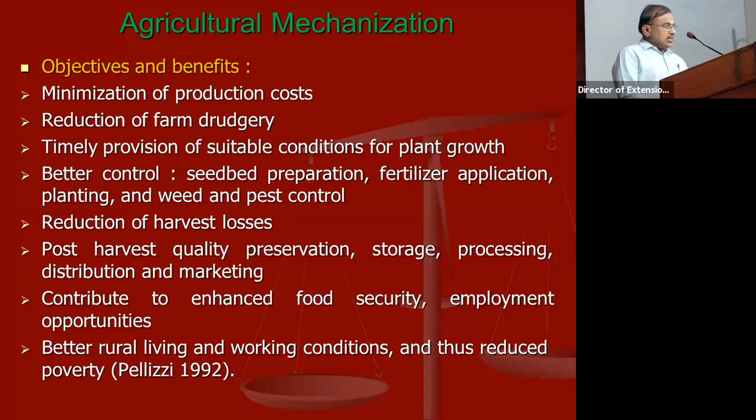Altogether, it helps the food security of our nation. Similarly, it also generates the required employment opportunities. So farm mechanization also helps for better rural living and working conditions of the people, and thus reduces the poverty present in rural agriculture. Now, I am going to deal with some of the machineries that are really practicable and applicable for the present situation.

So, concerning the paddy crop, the first operation we normally do is ploughing, followed by standing water, then we do the puddling operation. In conventional puddling, cage wheels are fitted to the tractor, and with either the cultivator or rotavator, the tractor power source is operated in the main field.

Now, the entire scenario can be changed if you have a rice special tractor with rotopuddler. Automatically the required condition of the puddling will be improved. You will have better quality, very good time reduction, and less water requirement, and this may also help in the mechanized transplanting operation. So like this, it has a lot of applications.

The next one is the laser leveler exclusively for wetland condition. In the wetland condition for paddy growing, water is one of the critical inputs which has to be given throughout the period of the crop. We have to see that the water is well maintained and conserved.

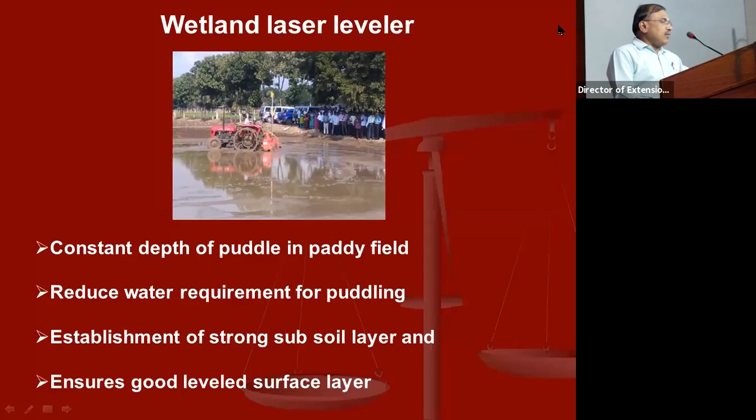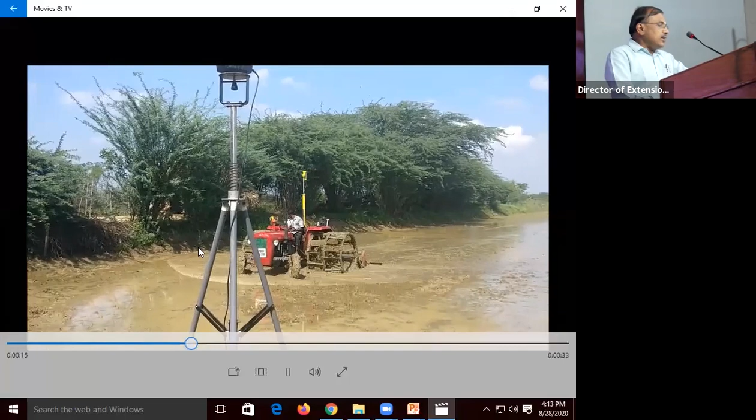Now, if you see this video clipping, you will understand the performance of the wetland laser leveler. Actually, this laser leveler is an attachment to any tractor, whether the tractor has cage wheels or is the rice special tractor. The laser leveler unit consists of a laser transmitter and laser receiver. This laser receiver is mounted on the rotopuddler unit, which is mounted at the rear side of the tractor.

So this rotopuddler movement is controlled by the laser receiver. You can see here the entire width of the field is uniformly level. If the field is uniformly level, then automatically you get the advantage of uniform standing water throughout the field. This is the main advantage of this wetland laser leveler.

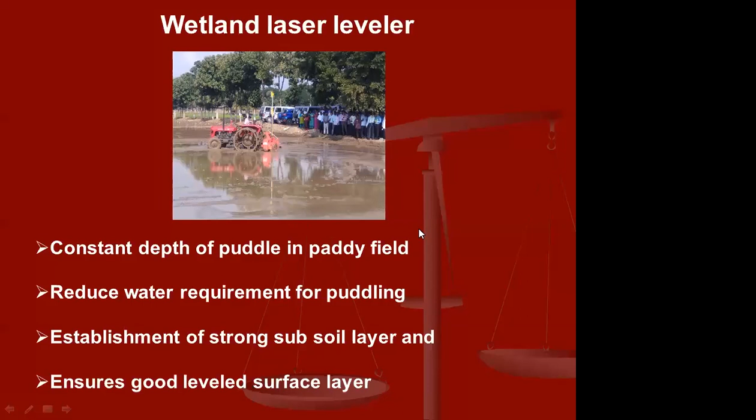Then the next important operation uses what is called a ridge plastering machine. This machine forms bunds around the periphery of the field. It is an attachment to the tractor, driven by the power take-off shaft of the tractor with a 3-point hitch system. At optimum soil moisture condition, this implement works well, which helps to form the bunds around the periphery of the field.

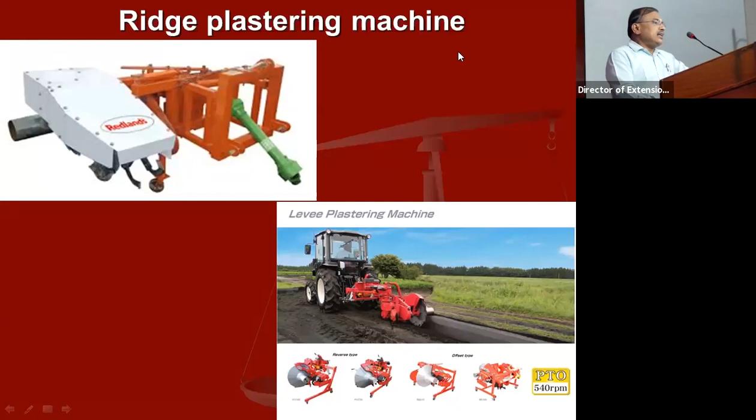Then the next important operation is nursery preparation. Since we are talking about mechanization, we require either a mat type nursery or a tray type nursery. Both nurseries can be prepared either by using a manual seeding machine, or you can also have an automatic seeding machine. So this machine is called a manual seeding machine,

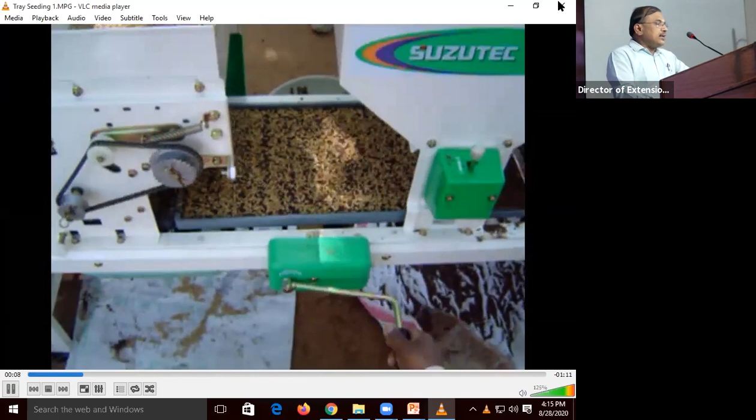to which you have to feed the trays one by one. Then the seeds will be dropped continuously. So like this, you have to operate it. Once you operate it, the seeds will be dropped on the trays. So this is a manually operated machine through which you can drop the seeds over the trays.

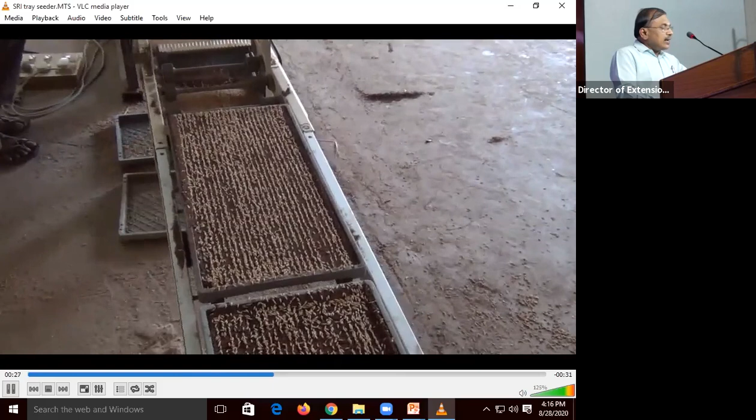Then similarly, we are having another SRI tray seeder, which is automatic. So what this machine does is, first you are feeding the pro tray. In the pro tray, the soil is first deposited. Over the soil, the paddy seeds will be just dropped in a line. So you can visualize how the seeds are dropped. So while germinating, the seedlings will be having uniform diameter throughout the space. So this is the advantage of the nursery preparation machine.

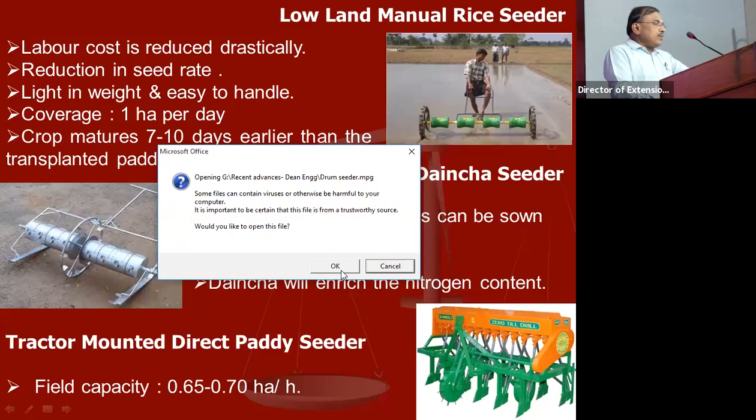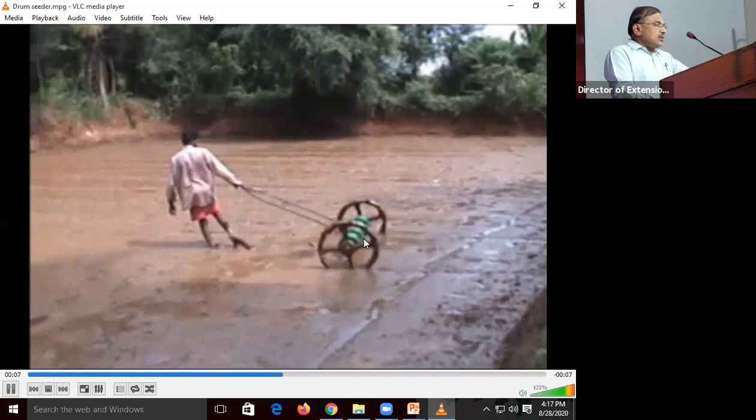Then sometimes, as far as Tamil Nadu condition is concerned, if we don't have enough water, or if the water is not available, then the better option is you can go for the lowland drum seeder, direct drum seeder. Here you should use the pre-germinated paddy seeds, and you can fill in the drums. In 8 rows, seeds will be dropped uniformly. At the time of operation, there should not be any standing water, and water should be drained. Then you operate it, and seeds will be sown in 8 rows.

So if you operate it, there is a very good reduction in labor cost as well as seed rate, and you can cover around 1 hectare per day. And one advantage you are getting is the crop matures 7 to 10 days earlier than the transplanted paddy. But one thing I want to share is, when you use this drum seeder, better to have a pre-emergence herbicide through which you can avoid the first weeding.

And similarly, another equipment is called a paddy cum Daincha seeder. Here you will be having dropping of paddy and dhaincha seeds simultaneously in alternate rows, at a distance of around 25 centimeter, so between the paddy rows, one row will be with dhaincha. So this dhaincha and paddy will have uniform growth. Then during first weeding, you can either operate the Cono weeder, or you can have the SRI paddy power weeder, through which you can just submerge the dhaincha in the standing paddy field, through which you will be enriching the nitrogen content.

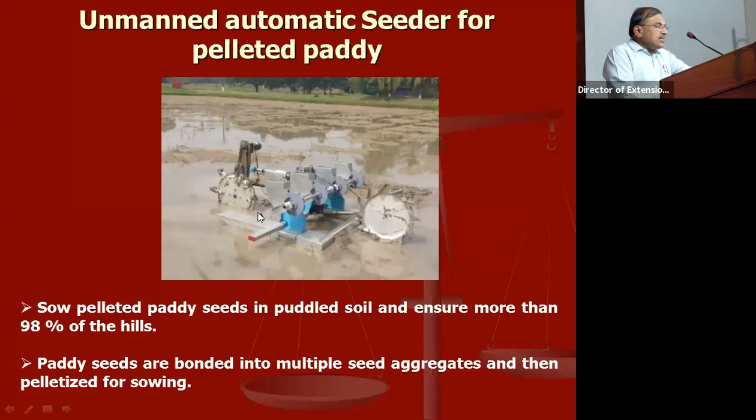Once it is established, the row to row spacing is 30 centimeter. Within a row, you can have 20 centimeter, 15 centimeter or 25 centimeter as per your requirement. But one thing I want to share is, at each place you may have a minimum of 2 to 3 seedlings per hill. This is the main advantage of this machine. We already developed this, and we are conducting trials. Once the trials are over, next year we will definitely be releasing this equipment for our farmers' benefit.

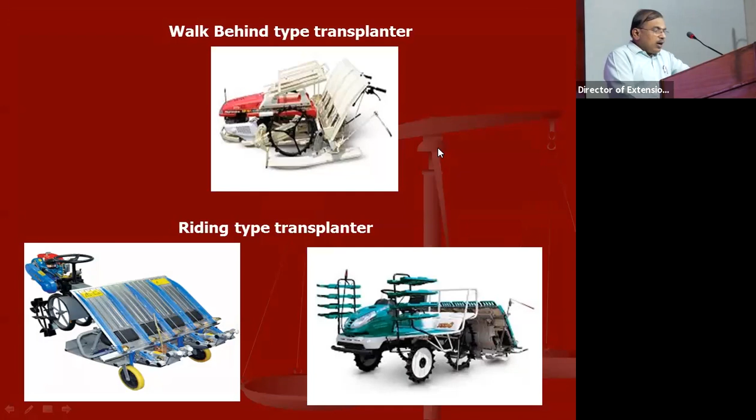So I recommend all these types of transplanter, but my recommendation is try to use the riding type transplanter. This riding type transplanter is very useful. The laborers need not walk in the puddled soil condition. They can sit comfortably and ride the transplanter. At a time, 6 rows transplanting will take place. Row to row spacing will be around 30 centimeter. Within the row, you can have 15 centimeter or 22 centimeter; as I said, the provision is there. Using this machine, we have now established around 16 acres of paddy field at our agricultural research station, Bhavanisagar. So this is the riding type 4-wheel drive transplanter.

Next is the weeding operation. Weeding is an important operation, for which we are recommending 2 things. One is called a Cono weeder, and another one is called a paddy power weeder.

This cono weeder design is based upon the IRRI design, which requires very good strength to do the push and pull operation, and this results in around 0.12 to 0.18 hectare per day. Whereas if you go for this paddy power weeder, it does the weeding operation beautifully.

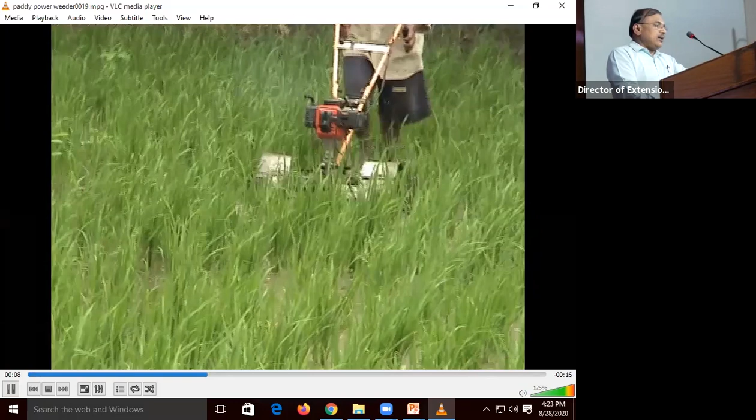So this is very lightweight equipment. It can be carried by one person without any problem. It can do the weeding operation in either 2 rows or 3 rows at a time. And this equipment is useful both for drum seeded paddy as well as transplanted paddy. You can use this equipment.

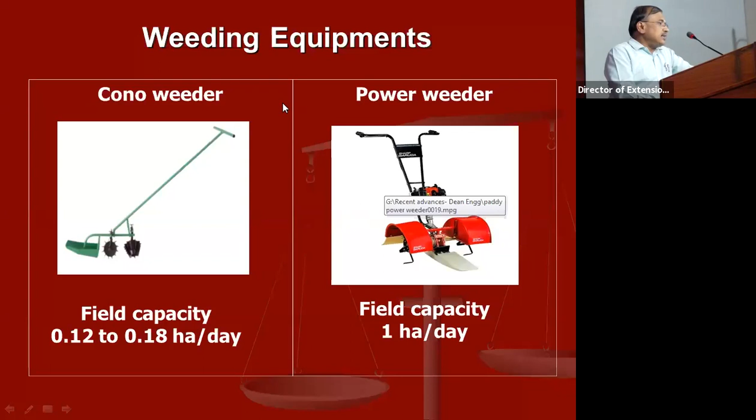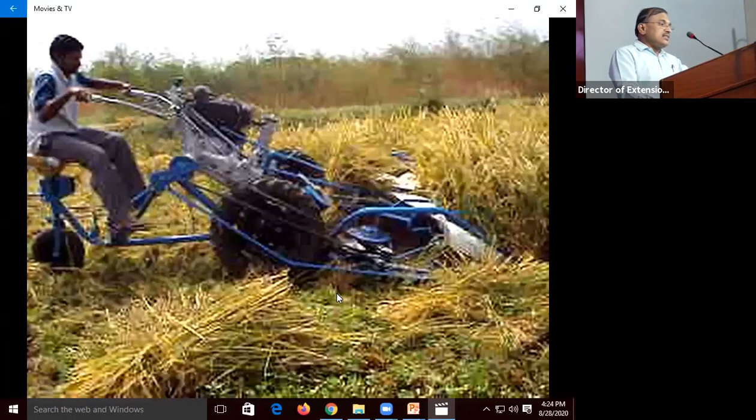And next is called a self-propelled reaper binder. This is a commercially available one through which you can do two different operations. One is called reaping, that is the harvesting operation, and another is called the binding operation. This machine does both operations simultaneously and it makes bundles in the field. So this is called the BCS reaper binder.

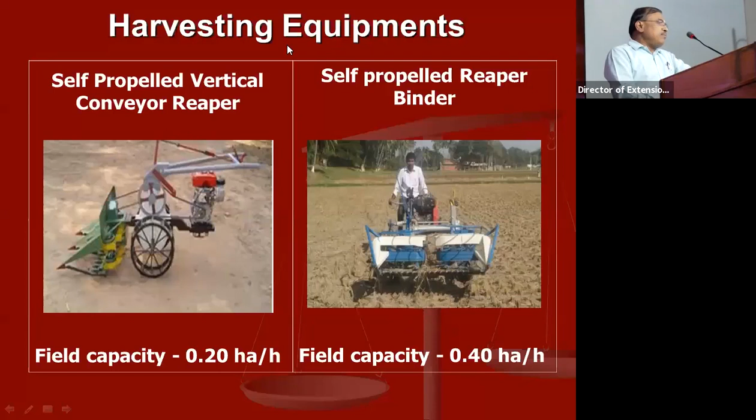So these two equipments you can strongly recommend wherever there is no way to use the present combine harvester. Using this equipment, you can harvest an area of 1 acre per hour. Then, as I said, there are a number of combine harvesters available: riding type small combine, track type small combine, tractor operated combine harvesters, paddy earhead harvesters, then paddy straw chopper. Like this, a number of equipments are available.

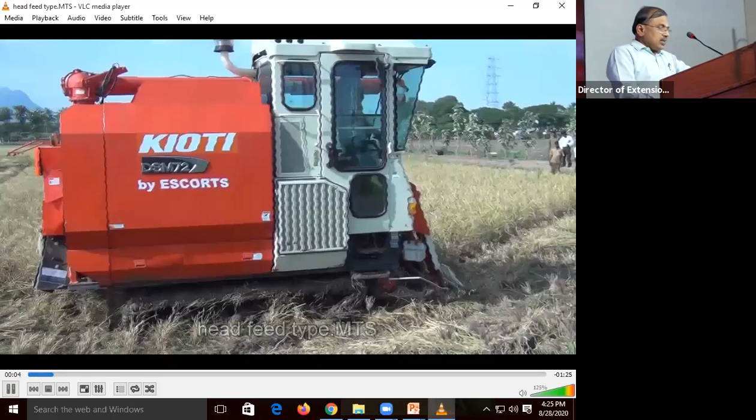So this is called a track type earhead harvester, through which you will be harvesting only the earheads of the paddy crop, and the straw will be cut and just deposited over the field. We have tested this equipment in our university. It does very beautifully. Wherever the clay soil is more, instead of the wheel type paddy combine, you can go for this track type paddy combine.

Here you will be harvesting only the earhead portion. The earhead portion will be threshed and the grains will be stored in the hopper present in the combine itself. Once this 600 kg hopper is filled, you can stop it and unload it. So this machine is called a track type combine.

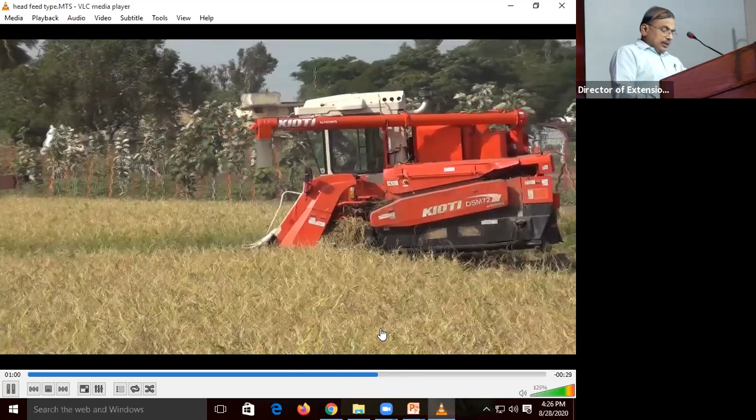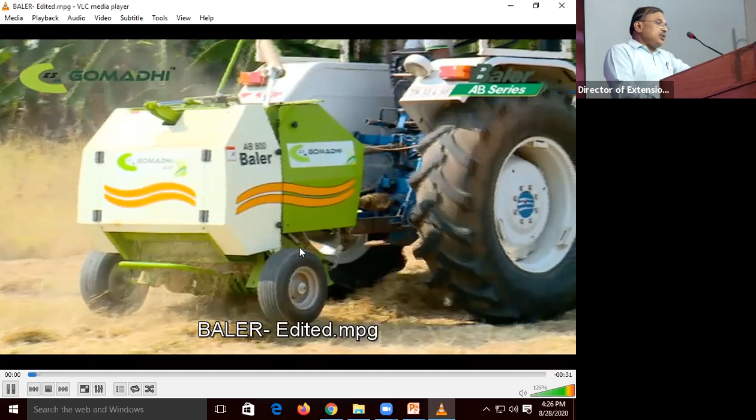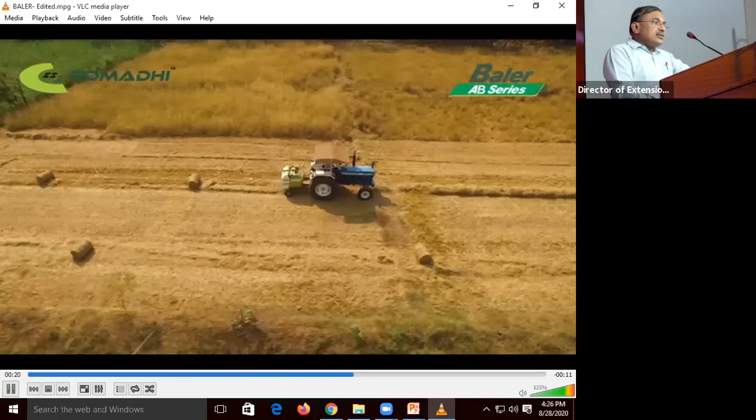Then after the combine operation, naturally the paddy straw will be present over the harvested field. So our recommendation is to make use of the baler. What this baler does is it collects the harvested paddy straw and makes it into a bale. You can collect these bales and transport them to the needy places, wherever they can be used as fodder, or they can also be taken to mushroom industries.

Each bale will have a weight of 15 to 45 kg depending upon the baler we are using. This baler is called a round type baler, and another is called a square type baler. If you engage the square type baler, you can accommodate more bales in the transport vehicle when compared to the round type baler.

Then coming to sugarcane. All of us know very well the energy consumption and production of sugarcane is the highest, and it is a labor intensive crop which requires 3,300 man-hours for different operations per hectare. Especially at the time of harvesting, you will be facing labor shortage, and if you delay the harvest, it may affect the yield of the crop as well as the juice quality. Referring to the cost of cultivation, 60% of the cost goes towards labor wages.

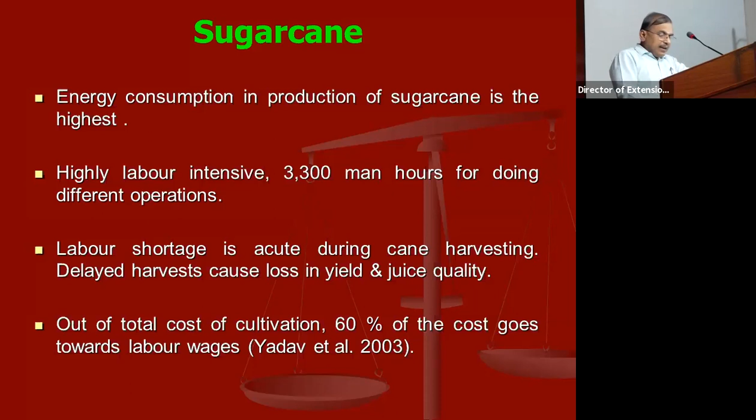In fact, these are some of the conventional tillage implements used for land preparation, starting from the disc plow. Then you can engage the rotavator. This rotavator very beautifully pulverizes the soil and levels the field. And once the field is level, you can go for the sugarcane ridger, through which you can form ridges spaced 5 feet apart.

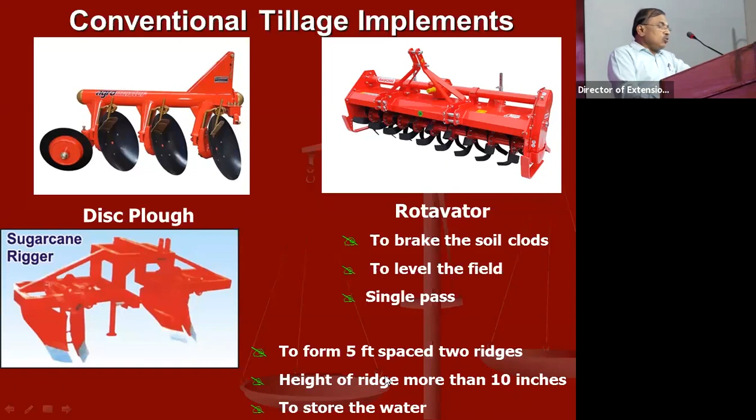This is recommended when planting of seeds is done manually. The height of the ridge is more than 25 centimeters, through which you can store enough quantity of water. But this is one more recommendation we are having.

In case of black cotton soil or clay soil, wherever you find it, normally in those soils there will be formation of a hard pan. This hard pan, you have to break it.

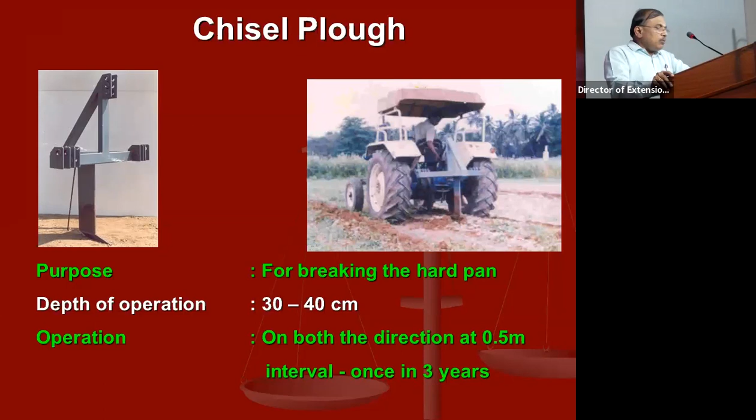For breaking the hard pan, you should not use the existing moldboard plow or disc plow. In that case, we recommend the chisel plow. This chisel plow goes up to a depth of 40 centimeters easily when hitched with a 40 HP tractor. Once you operate it, it breaks the hard pan. Automatically you get very good aeration, the physical structure is maintained, and water holding capacity of the soil is also increased. This equipment should be used once in 3 years, and it can be operated at every 0.5 meter interval.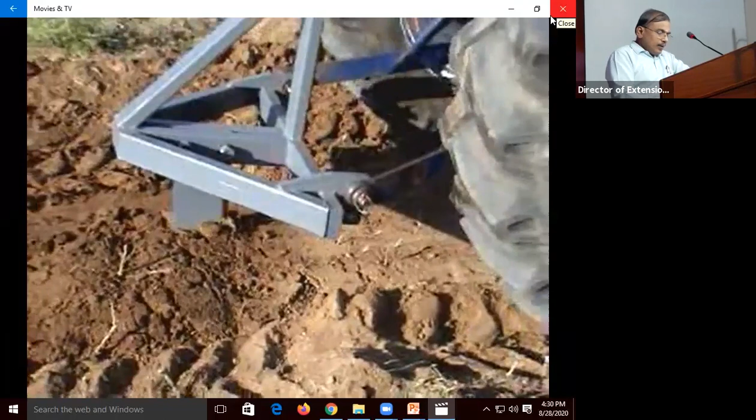Next is called the set cutter. If you do manual planting of sets, you can go for the sugarcane set cutting machine. This machine has a 0.5 HP electric motor, and using this equipment you can prepare single budded sets, with a capacity of 3,600 sets per hour.

Another technology is called the sugarcane bud chipper. With the bud chipper, buds are generated and put into trays. Then automatically you will be raising SSI seedlings.

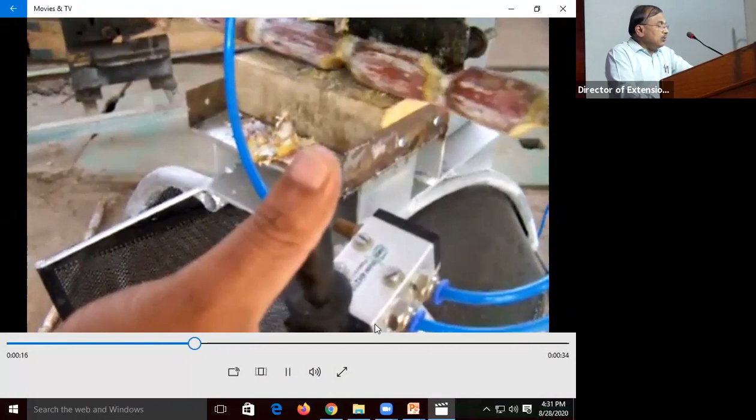These SSI seedlings, either you can use the manual method of transplanting, or you can go for the SSI transplanter. Using this machine, you can do 1,000 buds per hour, but for better operation, the pressure required is around 0.5 to 0.7 kg per centimeter square.

Another machine I am going to present is the sugarcane set cutter planter. Though this machine is very popular in northern India, in our southern India, especially Tamil Nadu, it was not introduced. That's why our esteemed Vice Chancellor directed us, and we established 3 acres of sugarcane mechanized field. One such equipment is called the sugarcane set cutter planter.

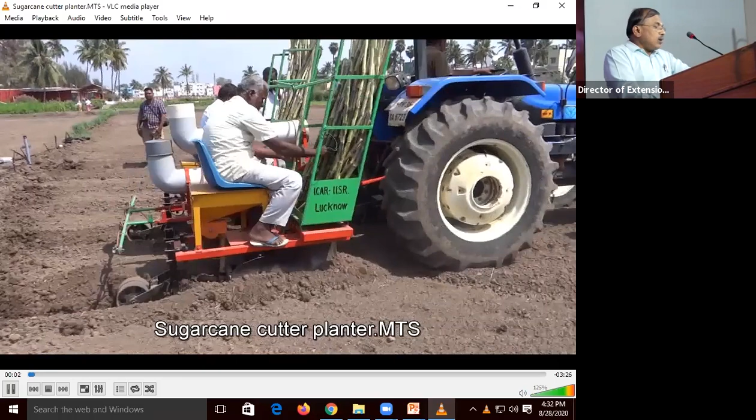Using this equipment, you can form 2 deep furrows at an interval of 5 feet. For mechanized field conditions, you have to recommend a 5 feet row to row spacing.

Then you feed the detrashed sugarcane, and here one cutter will be there. That cutter cuts the sugarcane and makes sets of 30 to 45 centimeters, and these sets are just placed in the deep furrow. Then here you can see one wheel is there, which compresses the soil after depositing it.

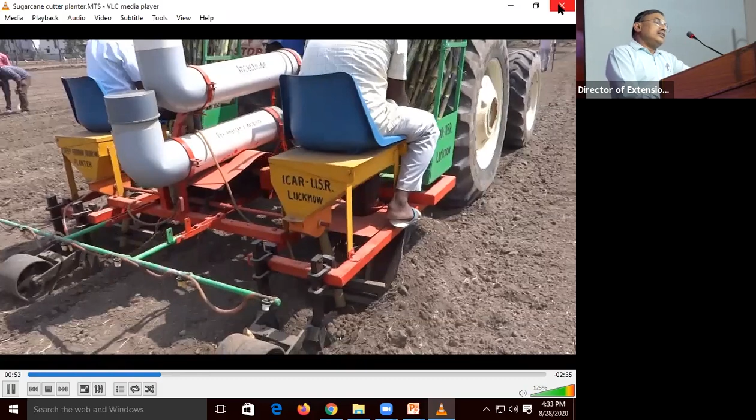Once this is planted, automatically you can irrigate the field with drip irrigation. Through drip irrigation itself, enough water is given and the crop will germinate. The cost of the equipment is around 1,20,000 rupees, and you require a minimum of 60 to 70 HP tractor.

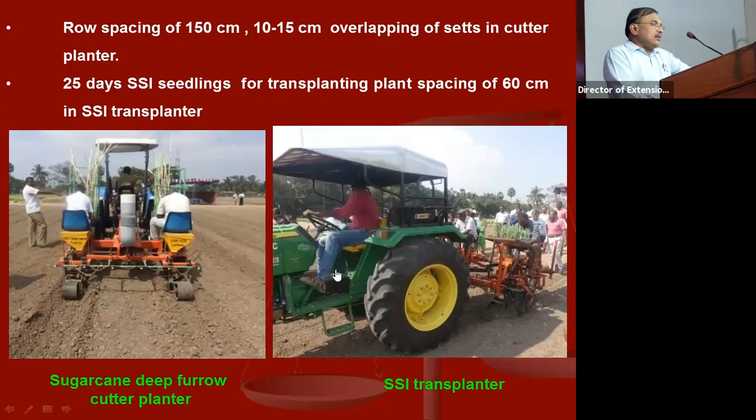Another equipment I am recommending is the SSI transplanter. Here you have to use 25 day old SSI seedlings, and transplanting should be done at every 60 centimeter interval. This equipment is also recommended for mechanized sugarcane cultivation.

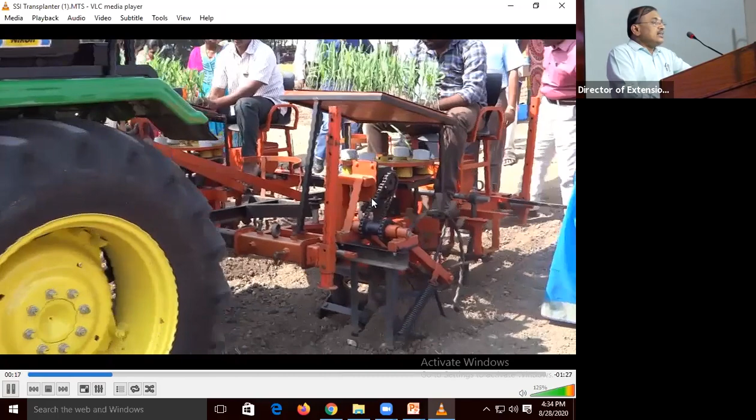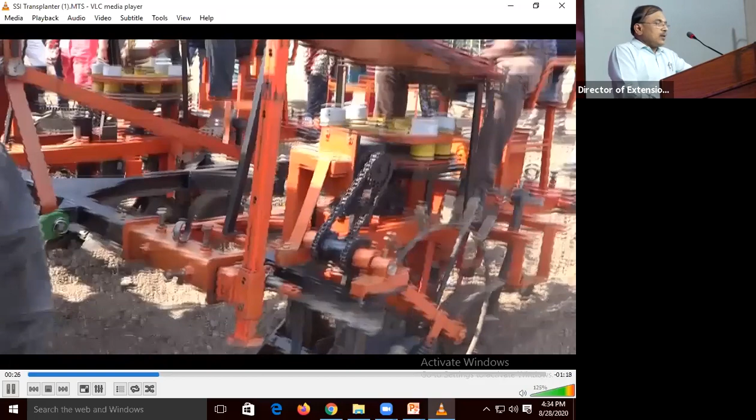Here the trays are loaded into the machine. Two operators sit over the seat, feeding the SSI method raised seedlings, and these seedlings are taken and deposited at an interval of 60 centimeters in the row. Once deposited, soil is heaped around it and compressed, so it stays in the erect position.

And here you have one marker, which helps the operator to operate the machine in the next row. This is also one of the equipment we used in our main campus for establishing the demonstration of sugarcane mechanization.

Another method is called the pit digger method of sugarcane planting. This equipment is operated by a 35 to 40 HP tractor, PTO operated, 3-point hitch system. Using this machine, you can dig 2 pits at a time. The pit diameter is around 3 feet 90 centimeters, row spacing is 150 centimeters center to center, and depth of pit is 30 centimeters. Per hour you can make pits covering 250 to 300 feet, and the cost of the machine is around 1.3 lakhs.

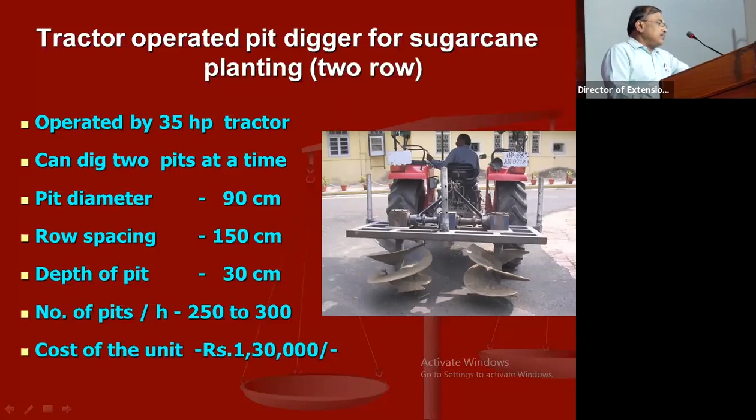Using this you can make the pits, and on the periphery of the pits you just dribble the sugarcane sets. Automatically you get very high cane yield, around 214 tons per hectare, as against the conventional method of 116 tons per hectare.

So here you will be getting a higher number of millable canes, and each cane weighs around 1.93 kg, and higher commercial cane sugar of around 12.9% has resulted.

Then the next operation which consumes more labor and time is called intercultivation or weeding operation. Even though 5 feet row to row spacing is recommended for using sugarcane harvesters, our farmers are still using either 2.5 feet, 3 feet, or 1.5 feet, 2 feet spacing. They are recommending adapting to this.

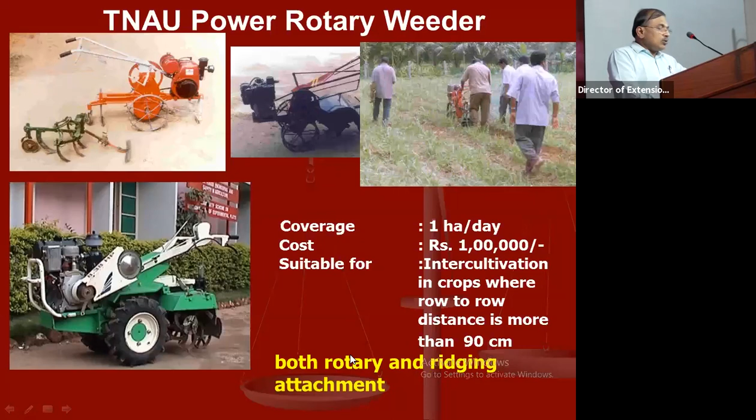So in those conditions, they can make use of this TNAU power weeder. Between the rows, you can operate it and do the weeding operation. Using this machine, you can cover an area of 1 hectare per day, with the cultivation practice row to row distance of 90 centimeters. Here you can have both rotary as well as ridging attachment.

Another important thing I want to share is the usage of the mini tractor. This mini tractor is commercially available, having horsepower between 18 to 20 HP, and the Mitsubishi tractor is commonly known to all farmers. You can introduce this mini tractor attached rotavator if the sugarcane is planted at a distance of 5 feet row to row, then you can mainly use this machine.

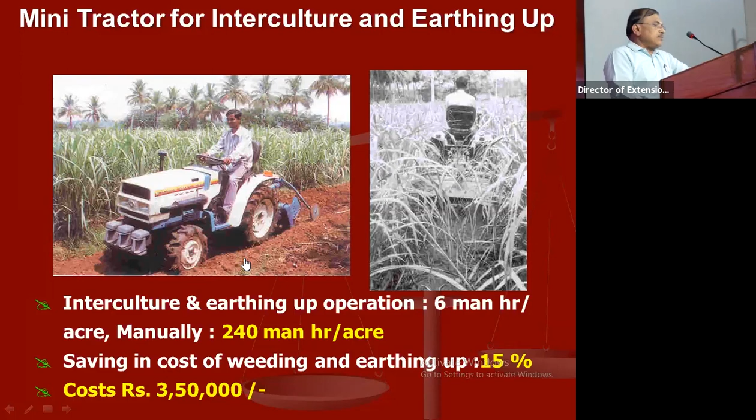If you use this machine, it does an operation of 6 man-hours per acre, whereas manually it requires 240 man-hours per acre. So you will be having very good savings in cost, and the cost of the machine is around 3,50,000 rupees. Similarly, you can do the earthing up operation and interculture operation making use of this mini tractor.

Then another thing is the existing cultivator. You can also make some modification, that is rearranging the tines in the existing cultivator, and use it accordingly. The tines are very much important here, we should have enough passage for movement of the tines. The tine width may either be 45 centimeters or 60 centimeters. So if 90 centimeter row to row spacing is available, there you can employ this cultivator with tines for the weeding operation.

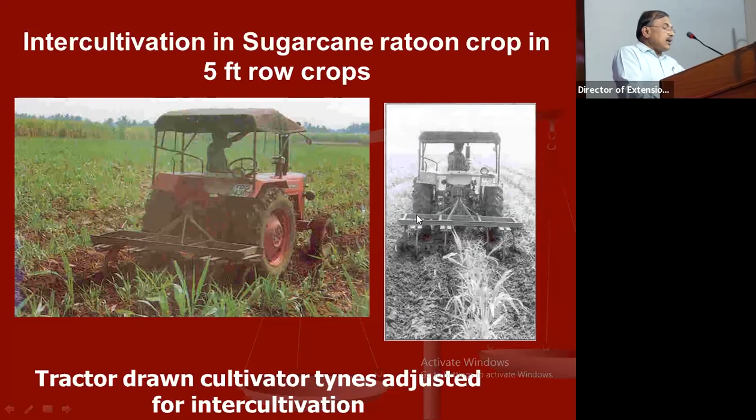Suppose in this case we made a 3-row rotary weeder through which you can do the weeding operation very widely. This is also a 3-point hitch system. The tractor tires are just extended, and the equipment is operated by PTO. It does weeding in 3 rows at a time.

So this is one of the best equipment. It covers around 0.24 hectare per hour, which results in a saving in cost of 73%, saving in time of 85%, and the cost of the equipment is around 1,50,000.

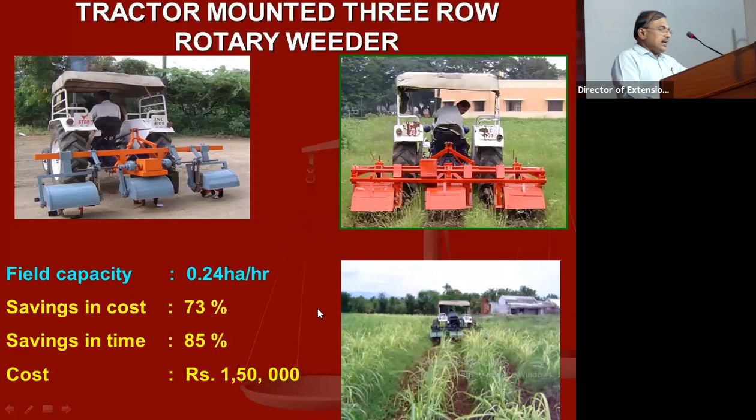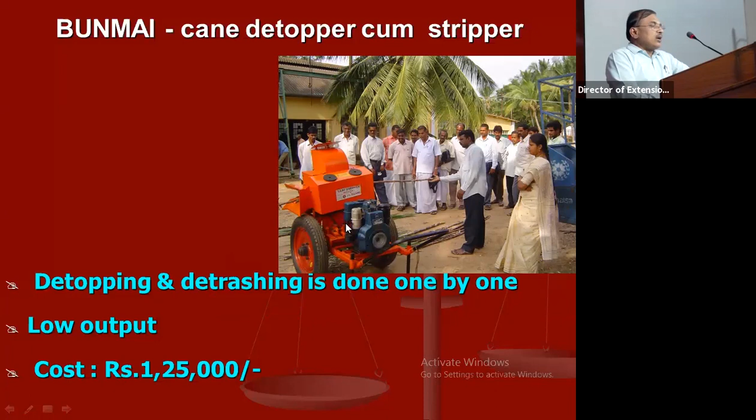Next is another operation called detrashing operation. Normally detrashing has to be done, but our farmers, because of non-availability of labor, do it conventionally with sugarcane sticking sickles. But we have one cane detopper cum stripper, which does detopping and detrashing 1 by 1 cane. This gives very low output, even though the cost of the machine is 1,25,000. Just for information, I am sharing this.

But our recommendation is, if you want to do the detrashing operation, you can have the TNAU model sugarcane detrasher. Both models are available, one is mild steel and another is stainless steel. The difference is only the weight. The stainless steel is around 0.4 kg, whereas the mild steel is 0.52 kg, through which you can do the detrashing effectively.

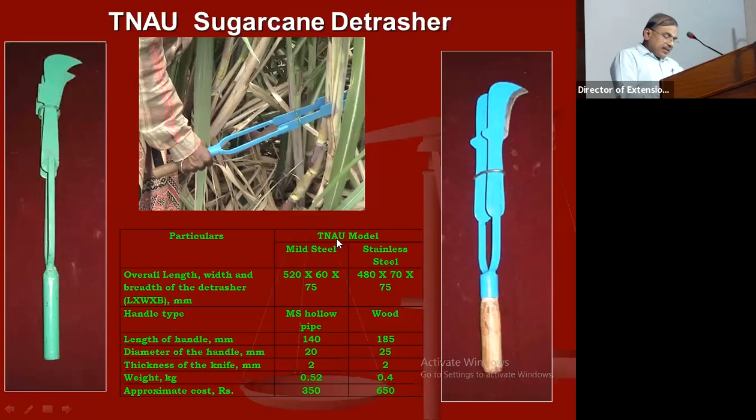Then the cane harvesters. We have a number of harvesters. All the harvesters are chopper harvesters, or you can call them billet harvesters. We don't have a successful whole cane harvester.

So these harvesters have to be employed if the sugarcane crop is raised in a row spacing of 5 feet or 1.5 meters. If you raise the crop in this way, then the machine can be employed, through which you can harvest around 200 to 300 tons per day of 8 hours. So this machine is also popular.

And another machine is called the chopper harvester, Austoft. This machine is also used in sugarcane areas.

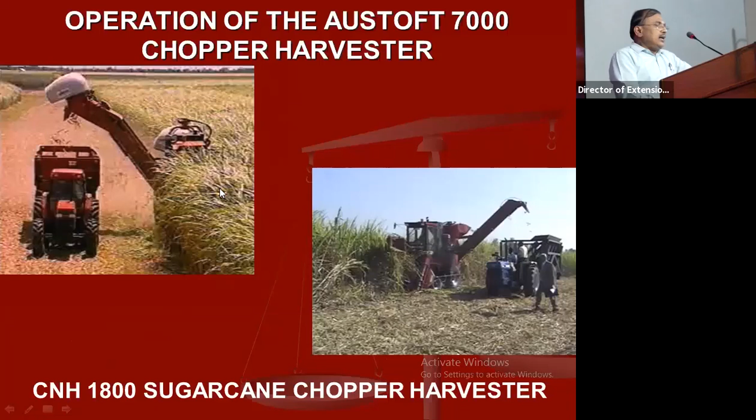And here another machine is the billet harvester I am talking about. What it does is 3 important operations. One is called detopping operation, where the top portion will be cut. And another operation is, in the front side you can see 2 dividers.

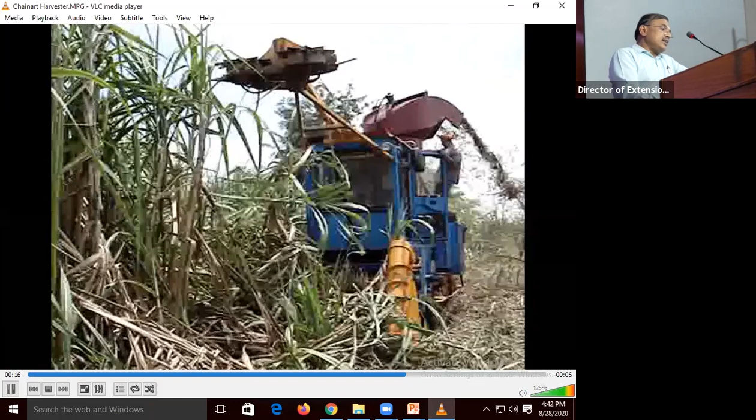These 2 dividers uplift the lodged cane and make it a straight cane, feeding it to the cutting mechanism. Once it cuts, base cutting will be done. Then after the cut, the cane enters into the machine, where it is made into billets of length between 30 to 45 centimeters.

Then it will be loaded in the tractor drawn trailer. So this is one type of harvester. Similarly, we have a number of other types of harvesters, but all these are of billet type only. At present in our sugar mills, they go either for the CLAAS sugarcane chopper harvester, or for the Shaktiman chopper harvester.

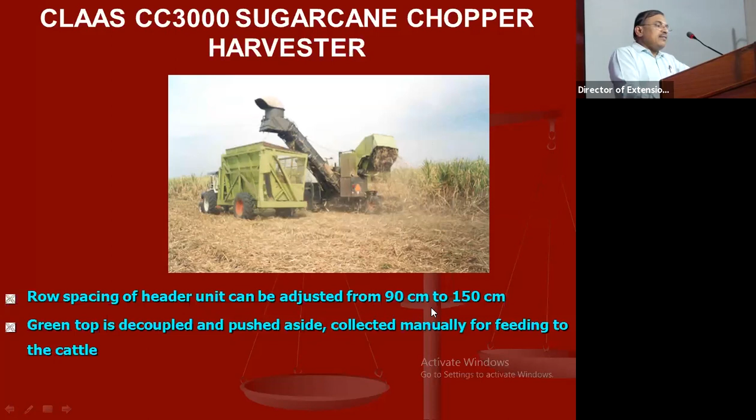Different chopper harvesters are available. This CLAAS sugarcane chopper harvester has a specialty in which the header unit can be adjusted from 3 feet to 5 feet. So this can also be used for the harvesting of sugarcane.

Similarly, other harvesters which are very popular are the Matsumoto Kiko, Uotani Tekko, and Bunmai - all these harvesters are available.

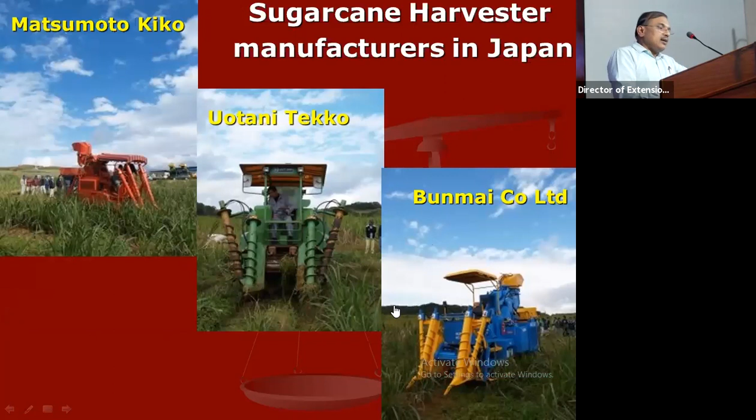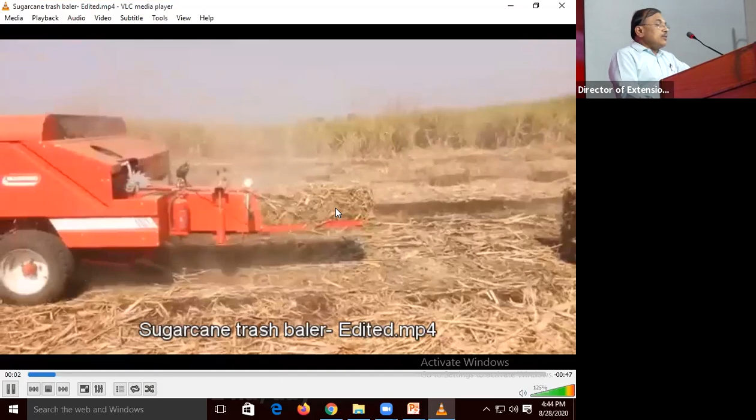After harvesting, the field is loaded with lots of trash. These trashes have to be collected from the field after harvesting. Once the trashes are collected, the machine used is called a baler. It collects and makes square or rectangular bales, which you can see here. You can transport these bales for other purposes. This is also one of the important equipment which is very popular in northern India. The field capacity of the machine is around 2 hectares per day.

Then we have another equipment called a trash collector cum shredder. Whatever sugarcane trash is available gets collected and cut into pieces, then spread over the field. That is the purpose of this trash collector cum shredder.

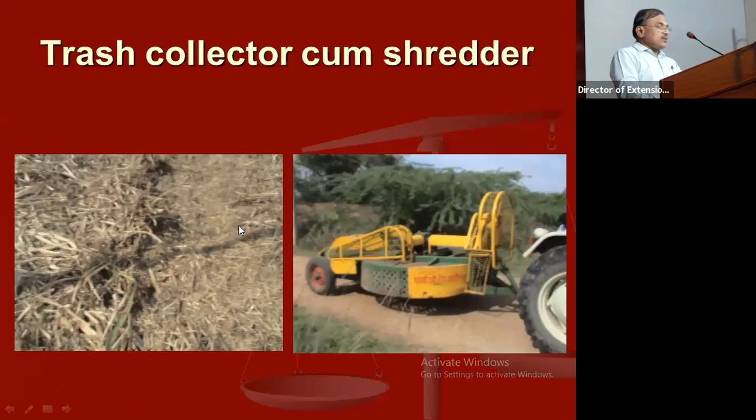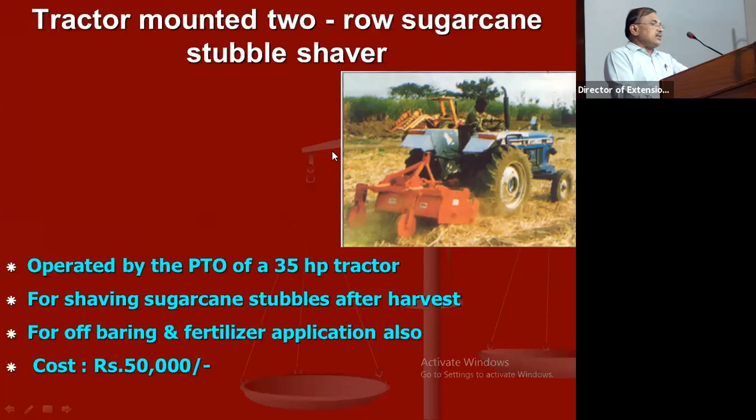Then after harvesting, for ratoon crop 1 or ratoon crop 2, you can use the stubble shaver. This machine is operated by the PTO of a tractor. It does the shaving of sugarcane stubble after harvesting. Similarly, this machine can also be used for off-barring as well as fertilizer application. The cost of the machine is around 50,000 rupees.

So stubble shaving comes after off-barring. Another model is available which is operated by a mini tractor. This mini tractor has around 18 to 20 HP, through which you can also do off-barring and form ridges, with a capacity of 0.2 hectare per hour.

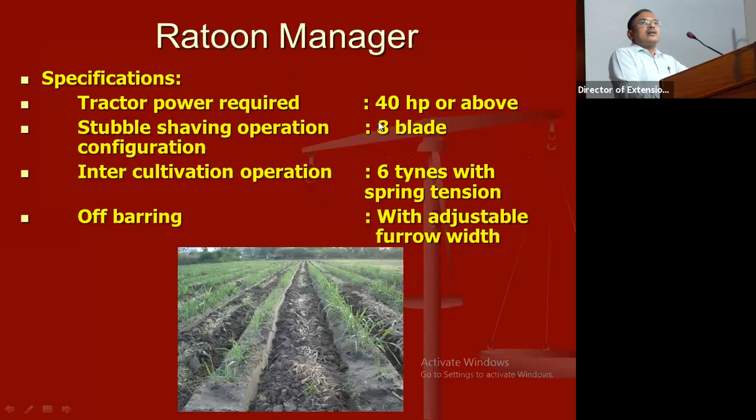Then another equipment introduced by our Indian Institute of Sugarcane Research is called the Ratoon Manager, for which we require a tractor power of 40 HP or above. This equipment cuts and makes a ridge, and then the ratoon stubble is shaved. Using this, you will get a very good ratoon crop after its usage.

Then coming to groundnut. Groundnut is one of the oilseed crops, mainly cultivated in Tamil Nadu as a rain-fed crop. In rain-fed cultivation, one important requirement is that before the depletion of moisture, you have to complete the sowing operation.

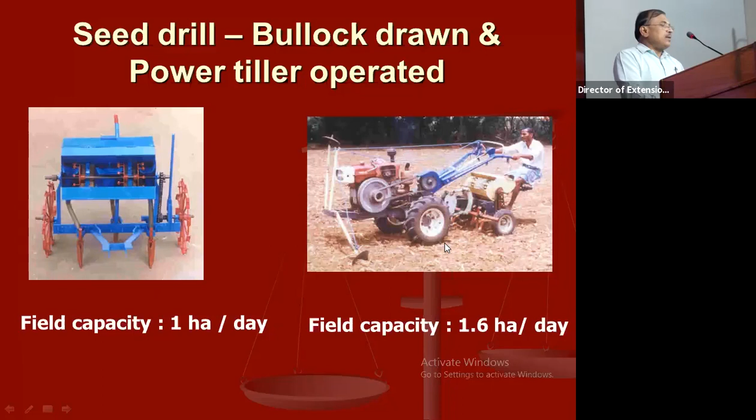If a farmer has one pair of animals, he can adopt this bullock drawn seed drill, or if he has a power tiller, he can go for the power tiller seed drill, using which he can sow 3 or 4 rows at a time. But our recommendation is to go for the cultivator mounted seed drill.

This cultivator is commonly available with the farming community. So they can purchase just this seed drill portion, mount it, and use it in the main field. At that time, you will be sowing seeds in 9 rows. The row to row spacing is around 22.5 centimeters. Within the row, the seed to seed spacing may vary from 7 to 12 centimeters. Our recommendation is 10 centimeters within a row, but because of the seed drill mechanism, you will have this variation.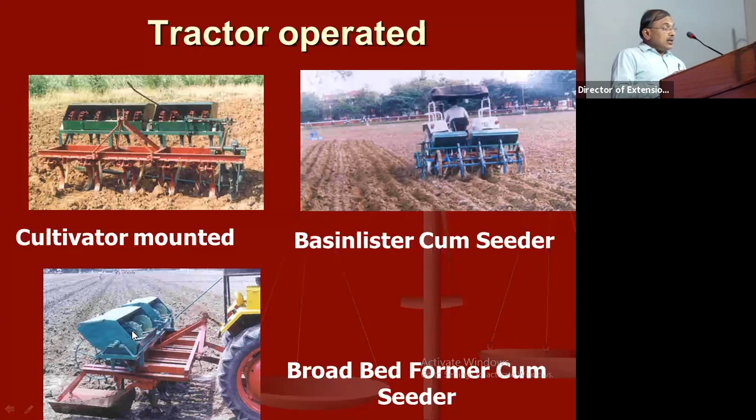On either side of the bed, you will be having two deep furrows. So with these two deep furrows, either you can irrigate the field, or whenever any excess rain is there, the excess water can also be drained.

Then another important operation which used to consume some more labor is called the plant protection operation. For this purpose, we are recommending the power tiller operated boom sprayer. If a farmer is having a power tiller, we can use this boom sprayer which is mounted on the front side of the power tiller. Only thing is you have to give enough spacing for mobility of the unit. So this side 3 meter, this side 3 meter.

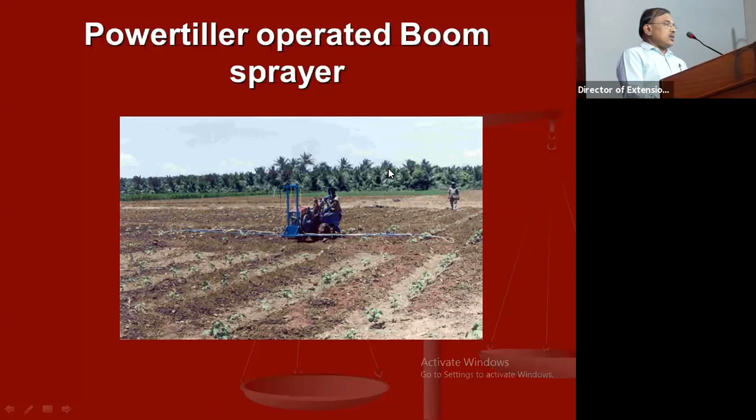Then another important operation for which we are having the equipment is the groundnut harvester. This groundnut harvester is an attachment to a 30 HP or 40 HP tractor, which is having a blade. This blade enters into the soil, uplifts the groundnut crop, then the uplifted crop will be taken by this conveyor chain, and it will be kept at the rear portion of the unit. It will be windrowed. Like this it does the operation.

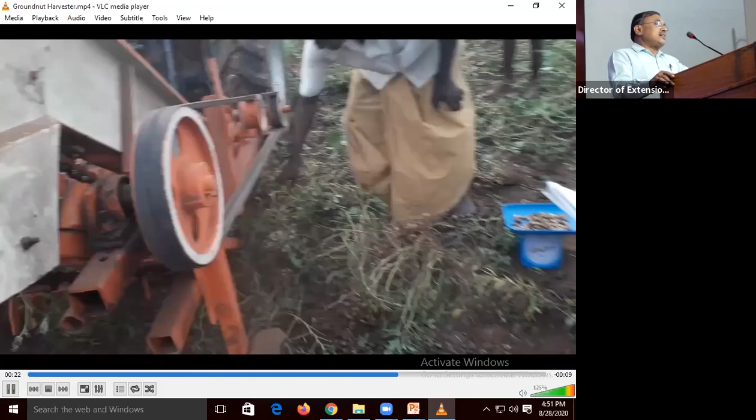This equipment works well in sandy soil, red sandy loam soil. When you raise the crop in black soil, there the moisture content is one of the important parameters which we have to take into account. Using this equipment, you can harvest around 5 acres per day of 8 hours.

Then after harvesting, you have to strip the pods from the haulm. For that purpose, we are having a groundnut stripper. 4 laborers will be sitting over this stripping unit, and they can do this stripping operation. You can have 300 kg per day with 4 women, and stripping efficiency is 97%. So we are not satisfied.

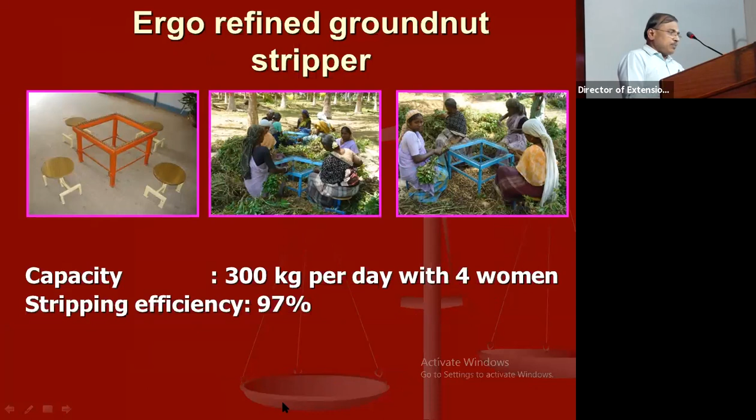So we have made an equipment that is called a groundnut stripper. It is operated by a 2 HP engine or 2 HP motor, with 2 persons for holding and pressing. It strips the crop raised in an area of 1 acre in 1 day. This is called the groundnut stripper. Very good equipment. Now I am talking about the groundnut thresher.

The groundnut thresher which we have developed is suited for a 5 HP power source. Either you can have electric motor operated or oil engine operated. Even it can be attached to the tractor PTO system. The function of this thresher is separating and cleaning the freshly harvested crop. This is an axial flow type. Now a modification of this existing groundnut thresher is available with a higher capacity, and it is being manufactured in Coimbatore and given to a number of farmers for application.

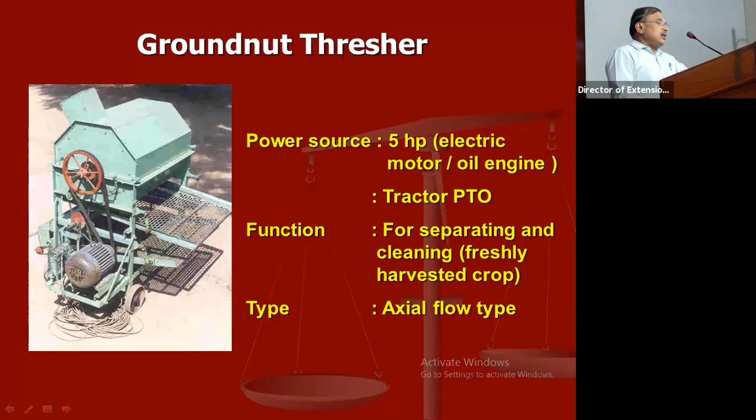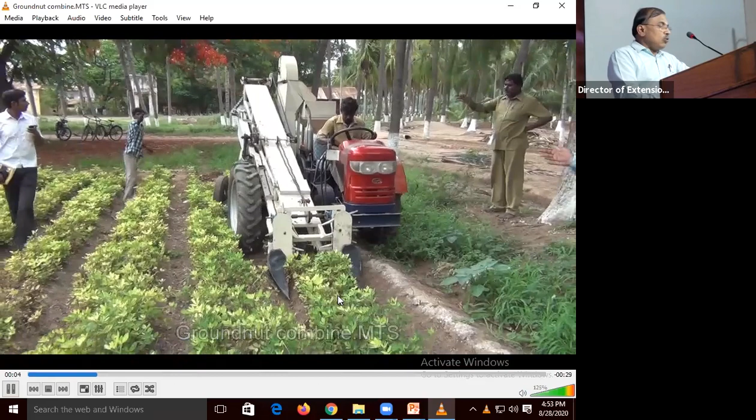The next very important equipment is the self-propelled groundnut combine. It does two operations, harvesting and stripping. You can use this self-propelled groundnut combine if the crop is raised on a raised bed system. In the bed, you will be having two rows. Here, a collector will be there, a digging blade will be there. This digging blade enters into the bed and uproots the crop. The uprooted crop is carried by the conveyor, and at the end, you are having a stripping drum.

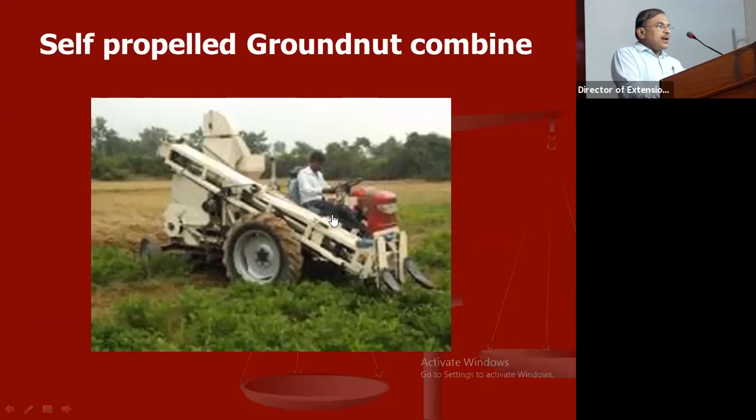The stripping drum removes the pods, the harvested pods are taken to the hopper, and the haulm will be left in the field itself. This is the self-propelled groundnut combine, which requires some more modification. Why? If you adopt this raised bed system, the plant population per square meter you will be getting is around 21, but our recommendation is around 33 per square meter. So research is still going on to optimize the spacing for operating this groundnut combine.

Then the next crop is cotton. Cotton is one of the important crops. Actually, this crop was the main crop of Tamil Nadu at one time, but now the area is getting reduced. Normally for cotton, the ploughing operation is done by disc plough and cultivator. If the cultivator is not available, you can go for the rotavator. You will be having a better pulverized, leveled field. Once the pulverized leveled field is available, you can do the sowing at the required row spacing using a tractor-drawn inclined plate planter.

Either you can go for 2 feet or 3 feet or 4 feet or 5 feet, depending upon the variety which we are going to sow. Accordingly, the field capacity will be varying. So here we get sown around 2 feet, which gives a result of 2 hectares per day. So you will be having around 5 rows.

Then another important machine, which is called a tractor operated pneumatic seed planter. Normally, whenever any seed planter is used, we use delinted cotton seed. Once the delinted cotton seed is put into the seed hopper, the vacuum generated by the blower automatically picks only one seed at a time and releases it at the required depth.

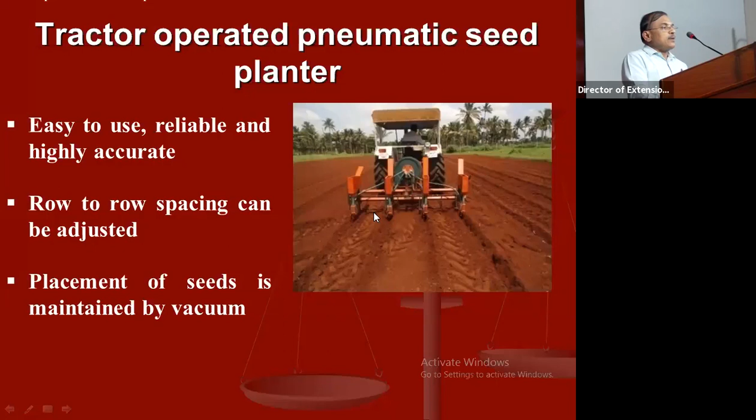Then next is the weeding operation. Either you can go for the power weeder, and if the row spacing is more than 2 feet or 2.5 feet, then you can go for tractor operated power weeders. Because if the row spacing is more than 2 feet, the tyre movement will not be a big problem. So in that case you can go for this.

Then another equipment, just for knowledge, I am introducing: the manually operated cotton picker. Wherever the totally burst bolls are there, you just use this, and this equipment picks the burst cotton and it will be loaded in the bag which is shoulder mounted. Using this you can do harvesting of cotton between 6 to 7 kg per hour.

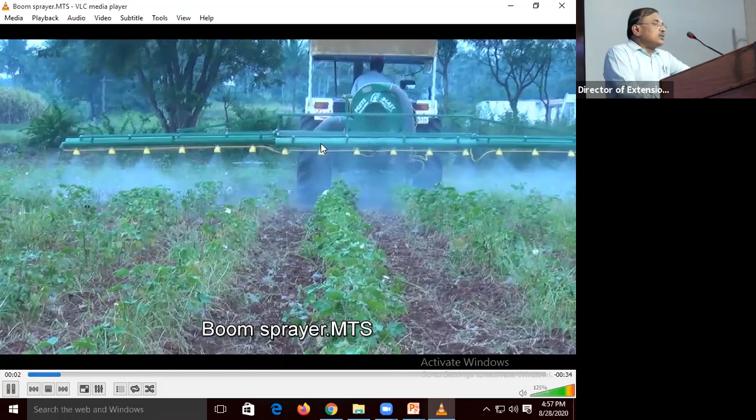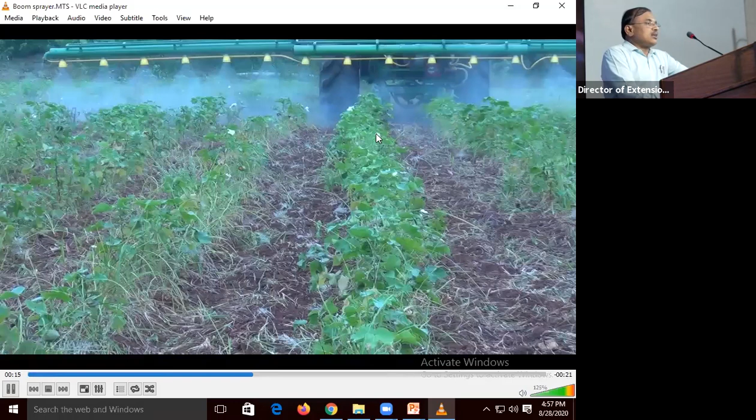Then another equipment which I want to show is called a boom sprayer. Here I am very much worried about the row spacing. If the row spacing is more than 3 feet, then it is very easy for us to make use of this machine. According to the height of the crop, the boom can be either raised or lowered. This is an air assisted boom sprayer, one of the best equipment, which covers a huge area in lesser time.

Then the cotton harvester. I am happy to mention here our university has succeeded in evolving a variety which has synchronized boll maturity and boll bursting. Only if the variety has synchronized boll bursting can you go for this cotton harvester. This cotton harvester is available, and commercial makes are available from John Deere as well as Shaktiman.

So here the machine has two important things. One is the guiding arrangement through which the plants will be guided into the picking zone. The picking zone picks the burst cotton. At the time of harvesting cotton, you have to apply a defoliant agent. The defoliant removes all the leafy material present in the crop, so the crop will have around 80 to 90% of the burst cotton.

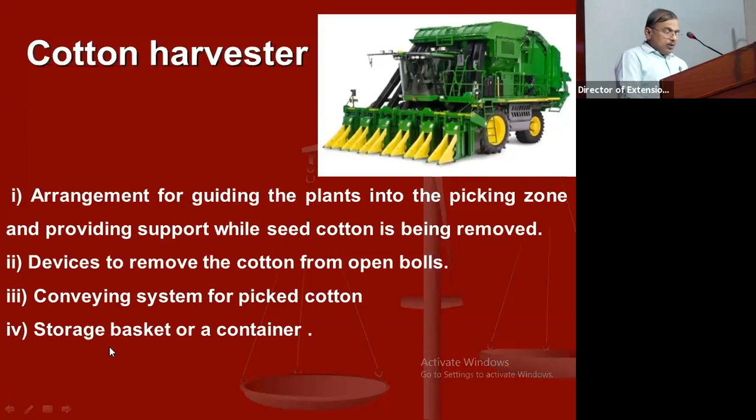Then the tractor operated rotary slasher. Once the crop is harvested, that is, a number of pickings are over, the standing crop will be there. To remove the standing crop requires a very good amount of labor. Instead, you can have this rotary slasher. This rotary slasher is rear mounted.

It is rear mounted on the tractor, and what it does is compress the crop, and the compressed cotton enters the cutting section. There, because of the rotating action of the cutting blades, the plant will be cut and shredded to a level of 25 millimeters. The capacity of the machine is around 1 hectare per day.

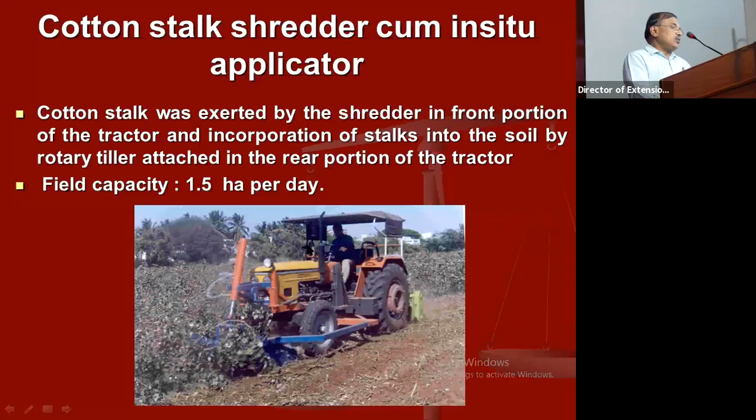And another machine is called a cotton stalk shredder cum applicator. Here we have two units: a front mounted shredder unit, and at the rear the conventional rotary tiller. It cuts the crop, shreds the crop, and the shredded cotton will be incorporated in the soil using this rotavator. The equipment has a capacity of around 1.5 hectares per day. So using this,